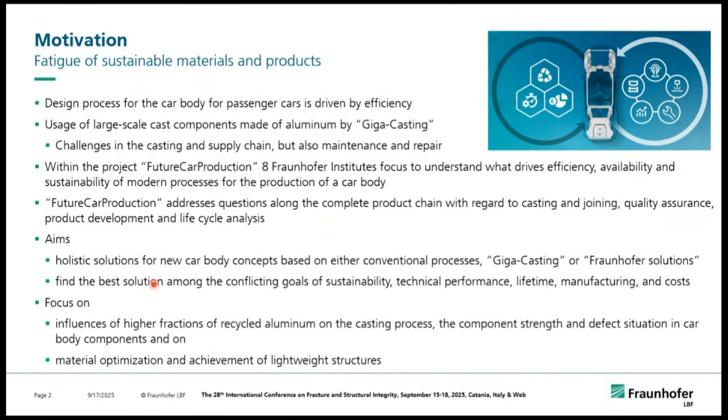So when we look a bit deeper into the specific sub-chapter and topic, we worked here on, as I said, an aluminium silicon magnesium alloy produced with gravity casting. And at the end, when we talk about recycling and reuse of aluminium, we might have the problem that during the recycling process, additional fractions of iron will gather in the recycling aluminium. We will have problems with copper and zinc that, due to the recycling process, will gather in the recycling alloys. And the question is, how much effort do we spend, or what can we spend in terms of CO2 emissions and so on, to clean up those alloys on the one side, or leave them as they are, because we can prove that the fatigue strength and integrity of a component at the end can still be met.

So there are a lot of influences from melting, from refining, and what we did in this case was concentrating on gravity casting, which is produced in a chill mold. What we see on the left side is the chill mold, or the casting at the end, produced in the chill mold, where we have the runner and the riser system of the casting system, and we removed some round specimens from this chill casting. We now concentrate in this presentation on unnotched specimens on the one side and 2 notch geometries on the other side, trying to see what is happening at the end with the fatigue strength, and what are the results under the different stress concentration factors.

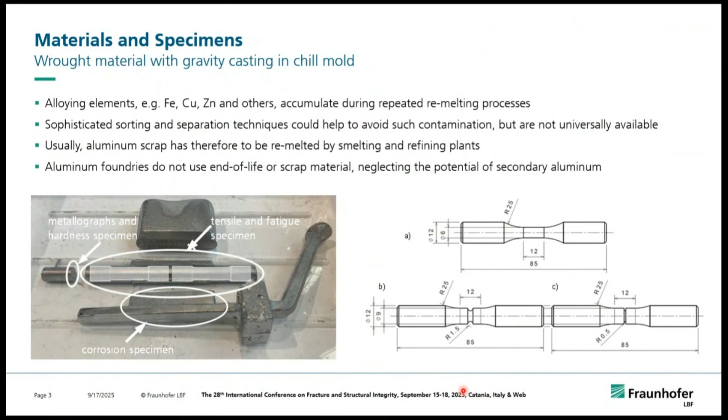Before we went into the manufacturing process and into the fatigue testing, we had to decide what we want to add to simulate a recycling aluminium alloy. And so we went for a primary alloy that is available on the market, which is an AlSi7Mg0.3. And then we decided to add one secondary alloy, as we call it here, where we added 0.5% of iron and 0.25% of manganese, and then a secondary 2 where we added to those 2 additions copper and also zinc.

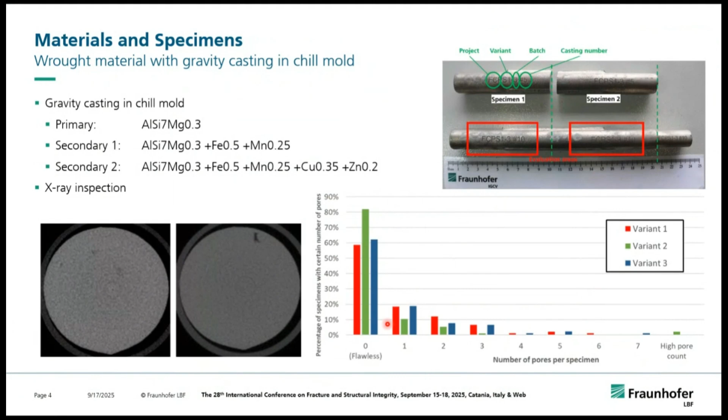For sure, we made some quality assurance. So colleagues from other Fraunhofer institutes made some scans, X-ray inspections, CT scans, to see what are the implications from the primary to those secondary alloys in terms of defect assembly and defect distribution. What we got to know at the end from those results is that most of those materials were flawless and the components were comparably sound, and we could not really see that the secondary alloy and those effects of iron or manganese add an additional factor of defects in the microstructure, which is good, and was the first proof for us that it can work to use recycling aluminium.

When we look at the quasi-static material data and the results, we made 2 attempts. We wanted to see on the first side what is the basic data, and what we see on the left side is a result from a 6mm tensile test specimen, 6mm in diameter.

And when we compare those results, we see the dramatic loss in the elongation, which is mainly related to the iron content. And we could see that for this secondary 2 alloy, where we had additionally copper and zinc, that we had a slight increase in the tensile strength. But the main result here was we have a reduction in the elongation at break.

On the other side, we made the same tests with a larger specimen to account for some size effects. The results were comparable, so we could not see, at least in this region, that we have a strong influence from size effects coming from the specimen.

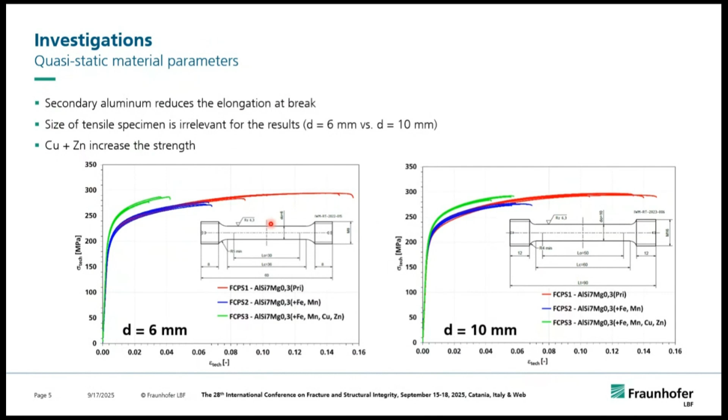Coming to the fatigue tests, we made stress and strain controlled fatigue tests, stress controlled tests until 10 to the power 7 cycles for alternating and tensile loading to get information from the notch effect. We had test frequencies around 90 to 115 hertz and made the evaluation according to maximum likelihood. And besides that, we made the strain-controlled fatigue tests in the range up to 10 hertz.

We made the evaluation basically on Coffin-Manson and Basquin and Morrow, but with a trilinear approach. I don't want to go too much into detail in this approach, but we see that sometimes this trilinear approach improves the compatibility between the strain life and the stress life curve.

At the end, what do we do here in this approach? We separate the elastic fraction of the strain life curve in 3 parts, and especially account for the fact that we have in the stress controlled area here around 10 to the power 6 cycles something like a knee point, which is classically not incorporated in the tests and in the evaluation according to the classic approach from Coffin-Manson and Basquin and Morrow.

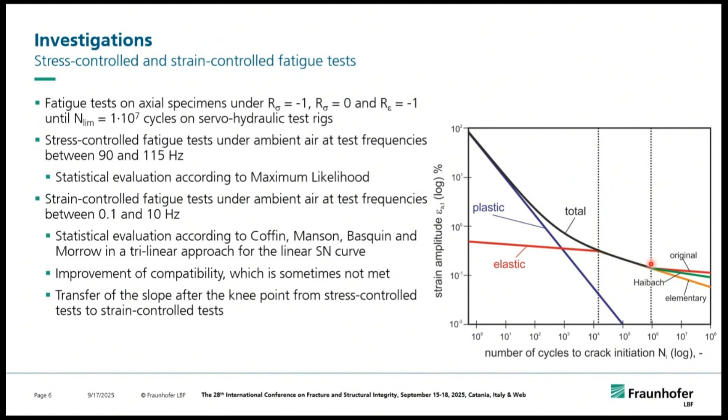When we look at the results, we start with the stress-controlled fatigue tests. The main takeaway from this picture here is that we see on the upper side the alternating loading results, and the tensile loading results beneath that for the unnotched configuration. And roughly we can state the difference between the fatigue strength for the secondary alloys and the primary alloys is not really large.

What we could see beneficially is that when we come to the secondary 1 and secondary 2 mean stress sensitivity, we got a loss in the mean stress sensitivity, which is beneficial on the one side. And looking at, for instance, the secondary 1 alloy, we had a lower slope in the medium cycle fatigue range, which is also beneficial when it comes to damage sum accumulation.

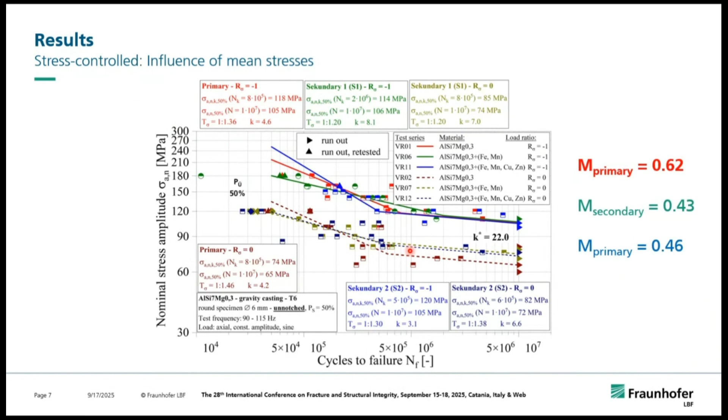Even in the tensile loading, we could see a slight improvement. This might be a bit related also to the scatter band, but nonetheless, it seems that the secondary alloys, due to the iron and copper content, improve in the tensile loading regime a little bit in fatigue strength. So we could not see that there is generally a loss in fatigue strength for those alloys.

It shows the same result for the notched configuration. So we have here in those 3 lines the results for the comparably smooth notch with a stress concentration factor of 1.72, and in relation to that, the SN curves for a stress concentration of 2.5. We see at the end notches are equalizers of fatigue strength and material strength, so that's what we see here. Not really surprising when we compare the unnotched specimens and go over to the notched configuration.

What is remarkable is that the scatter bands are comparably low. Okay, we did not test 50 specimens for each SN curve, but nonetheless, we see that the scatter bands that we derived here are comparably low, especially when we keep in mind that usually for a cast material, we would tend to have something like a T sigma of 1 to 1.3. So we have really good results in this case.

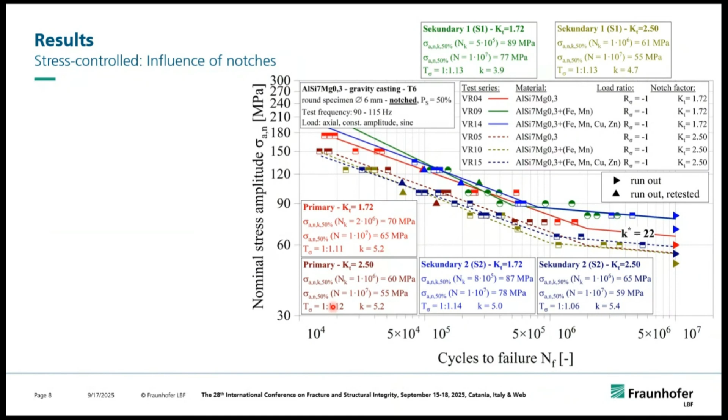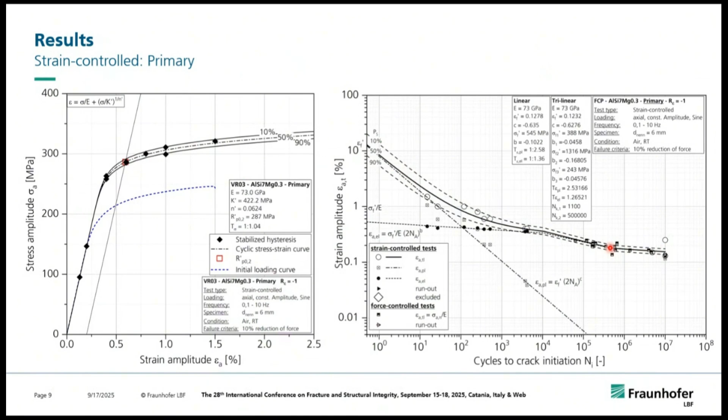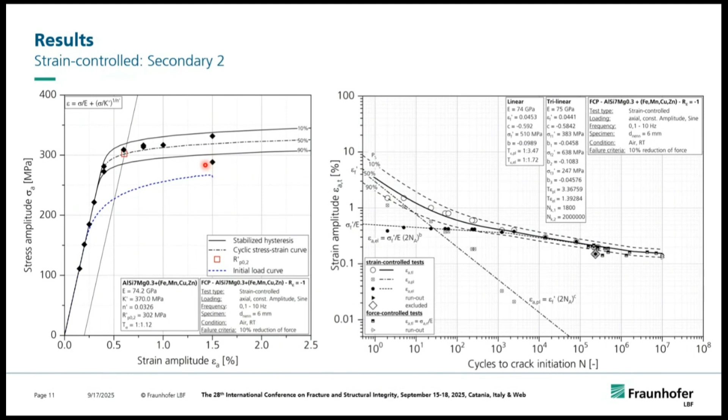When we look into the comparison of those curves, primary, secondary 1, secondary 2, we can state that we end up in the stress strain regime more or less in the same region. When it goes over to higher total strains, then there is a bit more performance in the primary alloy, and we see it also for the strain life curve. So in the strain life curve, we see that we have some number of cycles more to failure in the low cycle fatigue regime. So as I said, the elongation at break and the higher ductility play a role here also in the evaluation of those strain control tests.

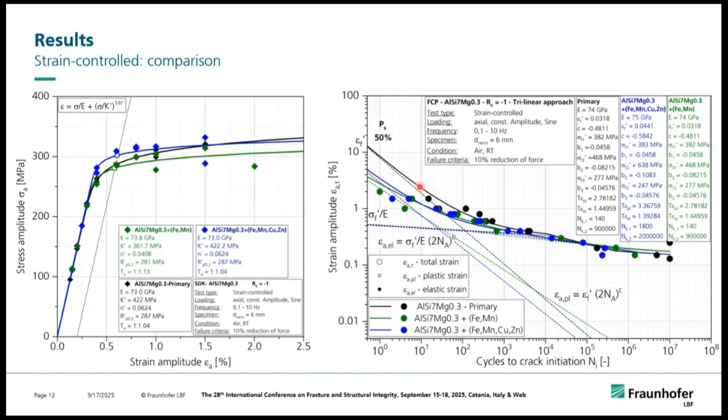When we look a bit into the microstructure, we made some evaluations, or more precisely the colleagues in Munich did, and when we compare those results, we have the aluminium and the silicon as the 2 main phases. The copper in the last secondary 2 alloy is somehow incorporated as a solid solution phase in the matrix. And when it comes to the secondary dendrite arm spacing, it was not really surprising. The values were comparable. And usually the secondary dendrite arm spacing is the value that we try to use for a comparison to the fatigue strength.

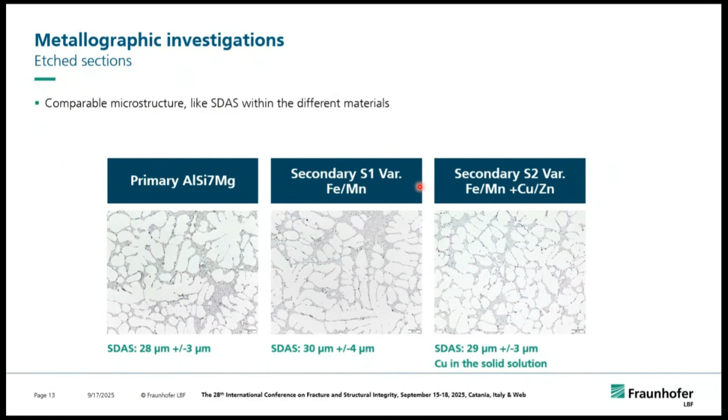Since we see not really a large difference in the secondary dendrite arm spacing and not in the fatigue strength, this matches once again also for those primary and secondary alloys with what we know from literature.

When I summarize my presentation, I hope I could give you a bit of an overview about this future car production project, and specifically about the fatigue strength evaluation of this aluminium alloy. What we are now working on is to go for an AlSi7Mg for high pressure die casting. A lot of components are produced in high pressure die casting in the automotive industry, and this is what we are currently doing.

What was for us somehow surprising and a benefit in performance, I would say, is that we don't need to be afraid of recycling alloys, even when we have higher fractions of iron and copper. So the results prove for us, as a rule of thumb, that we have comparable fatigue results to the primary alloy with the additional ingredients that we have here with copper, zinc, and so on. I would rather say that we have a bit of an improvement of the data. You saw that the slope for secondary 1 improved a little bit, got a bit flatter. We have comparably low scatter bands, and the mean stress sensitivity is also reduced while adding those iron and manganese fractions.

And I showed you also the cyclic hardening effect, that we lose a little bit in the LCF regime. This might not be interesting in most cases, I would guess. We're not talking about high elastoplastic loads on the car body parts when it comes to a total strain of 2 or 1.5%.

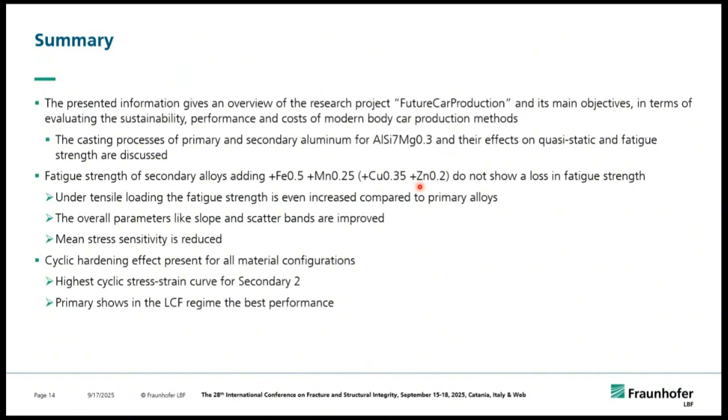So overall, we could not state that we really have a problem with this alloy when adding some elements here, and we could give a good estimate, I would say, for further developments in the direction of secondary alloys for aluminium.